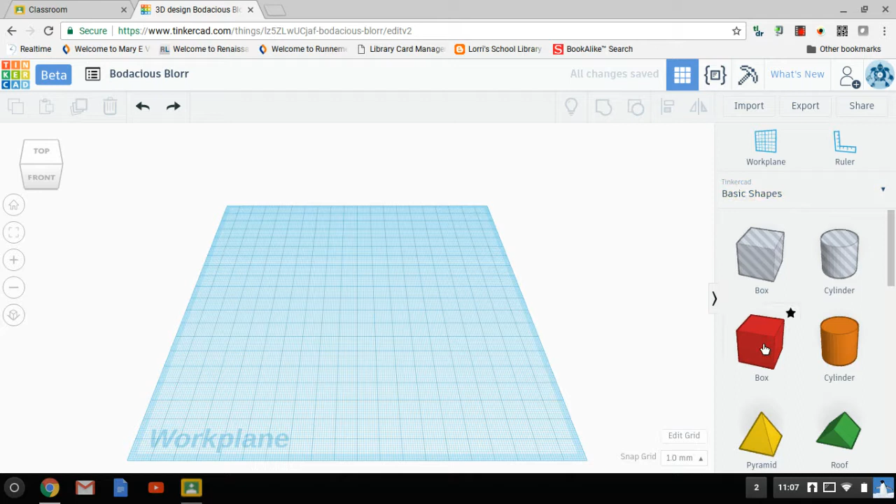So once you've clicked on that, the first thing we need to do is create a plate for your nametag to go on. We're going to use a basic cube on the print table, and that's going to allow us to stretch it out and flatten it so that we can build our nameplate on it. Under basic shapes, you're going to grab this red cube and pull it out onto the work plane.

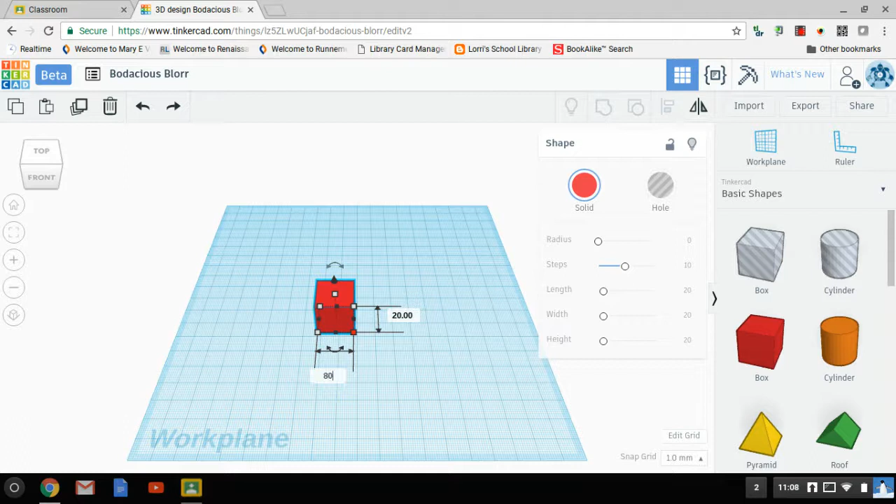And then we're going to actually stretch it out. The easiest way to do this is just to click on this white block here. Once you've clicked on that, you then have the option of typing in how big you want your plate to be. 20 wide is fine, we're going to leave it at 20, but we're going to change the length to 80. Now you can adjust this once you've decided what you're writing, but this is just a basic start.

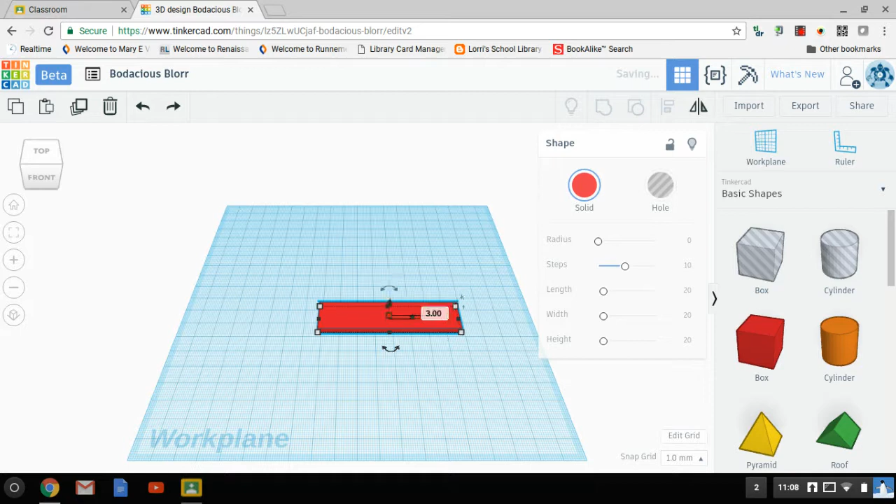Once you've done that, we also have to make it a little bit thinner. Right now this is very, very thick — it would look ridiculous as a nameplate. So we're going to change the height to 3 millimeters, by clicking on the white block here and then changing 20 to 3 and hitting enter. That's going to flatten this plate down for you, so now you have something to build your nameplate on.

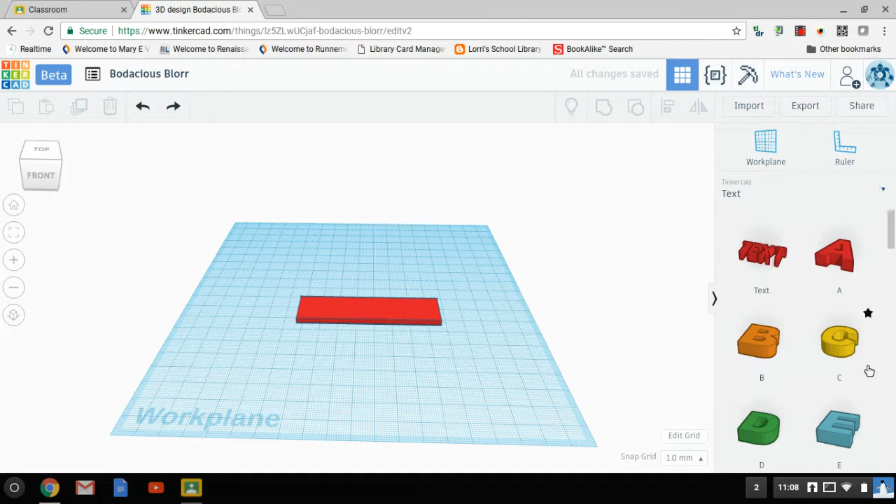After that, notice there is some thickness from the nameplate. What we want to do is be able to pull letters out. But right now, if I come over to basic shapes and choose text instead, and pull out the letter C and put it on the plate, it almost looks okay if I zoom in a little so you can see it better. But once I look at the side, you see there's not very much thickness, and if I look at the bottom, you can see it's cutting through the bottom of the plate. That's not what we want.

And if I pull it out, look how thick the letter actually is. So what's happening is the C is coming out on the work plane, and it's actually kind of being cut in half, or really three-quarters, by the plate itself.

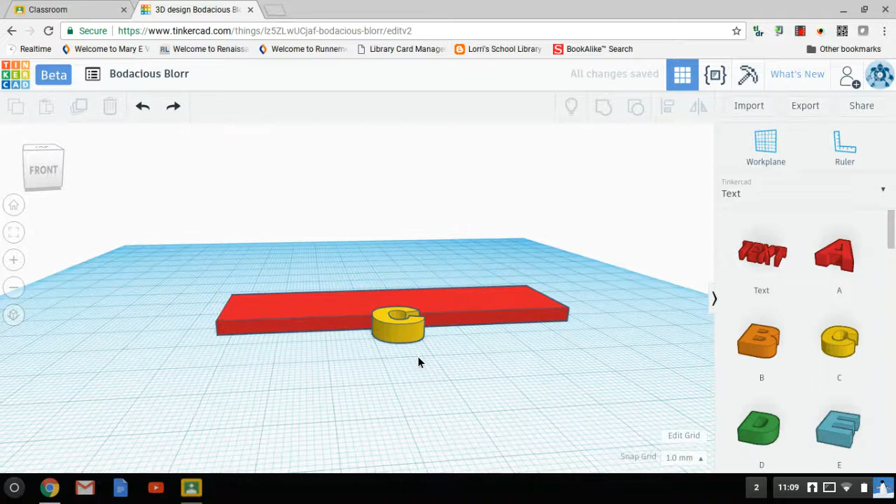So to fix that, what we want to do is grab what's called the work plane. This is the work plane here. When I click on that, it gives me this little block, and I can move where my objects come out. Right now, I want it to be on top of this plate, so if I click here, I now have this orange work plane, and you can see the difference where the print plane is.

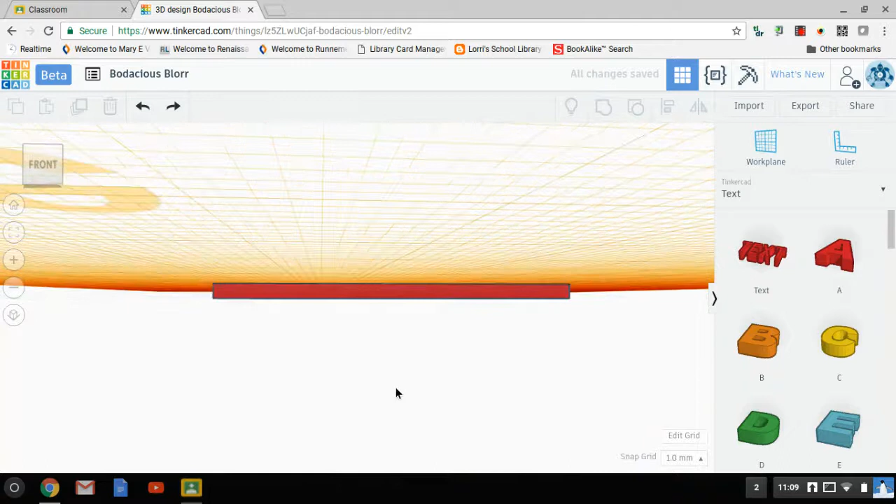If I get just the right angle, you can see the print plane here. This is the blue print plane, and this is the new work plane that's on top of our plate. So what we're going to do now, if I pulled out the C, rather than sitting below the surface, now it's sitting right on top, which is what we want.

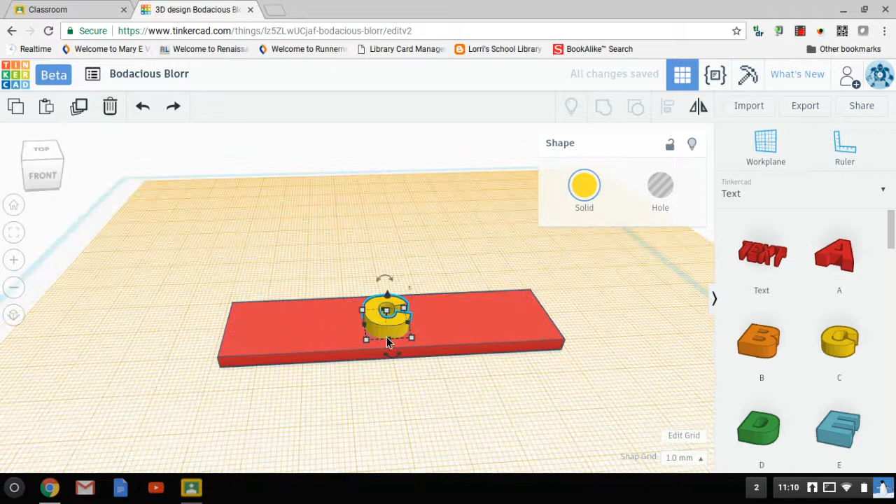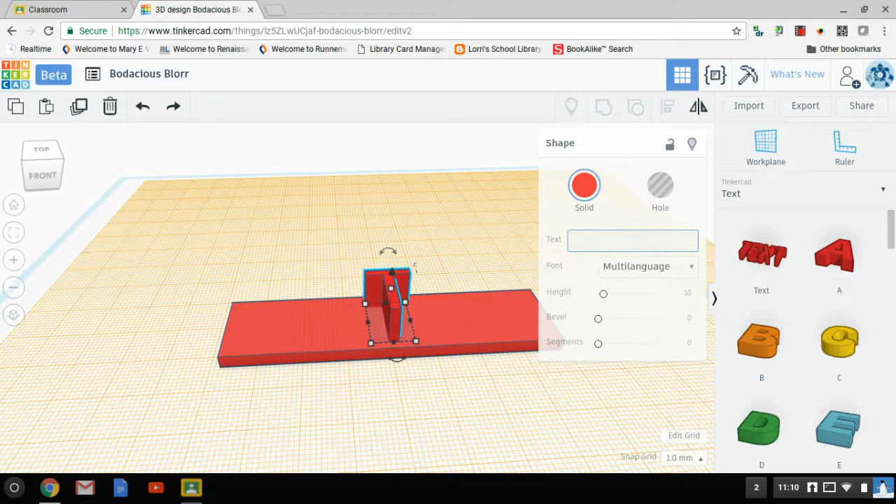I'm going to say Hawks, that's what we are here. And then you can click off of it. Right now, this looks pretty good, but what I want you to do is check from the top view.

So if you come over here, you can actually rotate it to the top. Notice now, when I'm looking at it from here, I can see it's pushed all the way down to the bottom. So if I click on the words again, I can use my arrow keys and walk it up so it's centered on the plate.

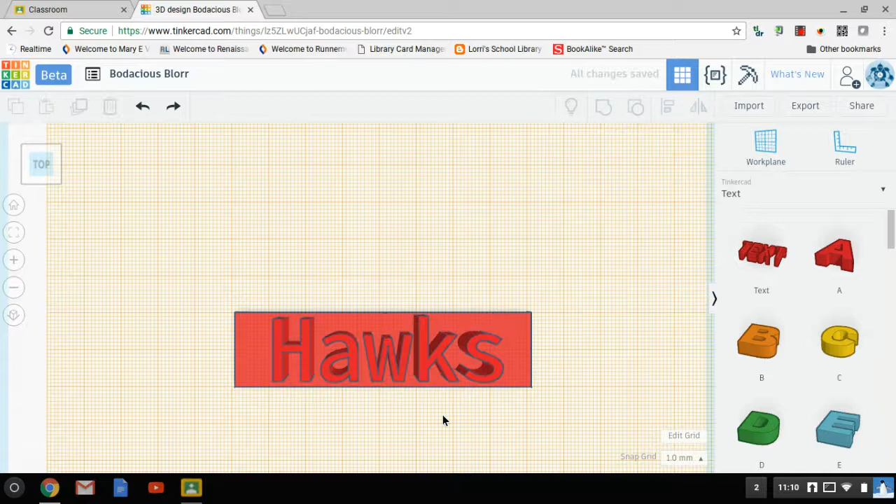Once I've done that, take my work plane, click over here off of the plate, and now I'm back to that blue work plane—you can see it's good. So this is option 1 for your nameplate. You can go ahead and just put your letters like that.

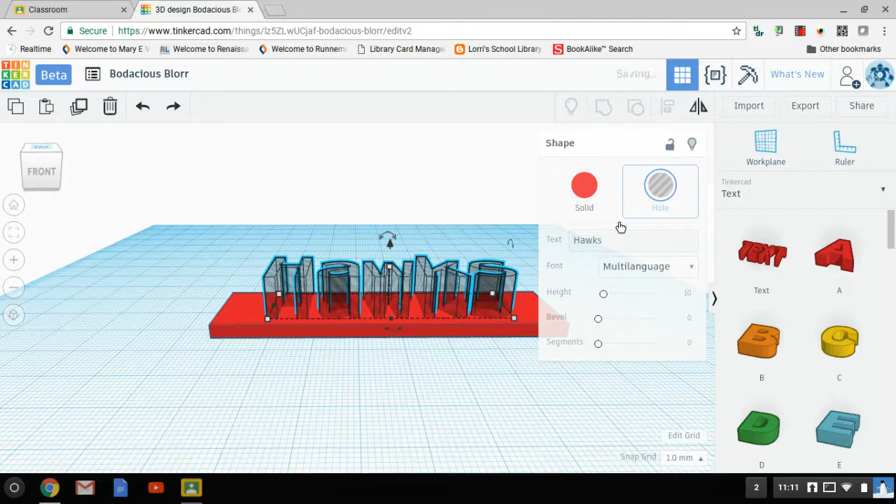Option 2 would be to change these to a hole. So if you click on them and choose this button here, which is hole, I can now grab it and drop it through. And it's important that it's sticking out of the top and the bottom—that's how I know it's going to cut all the way through.

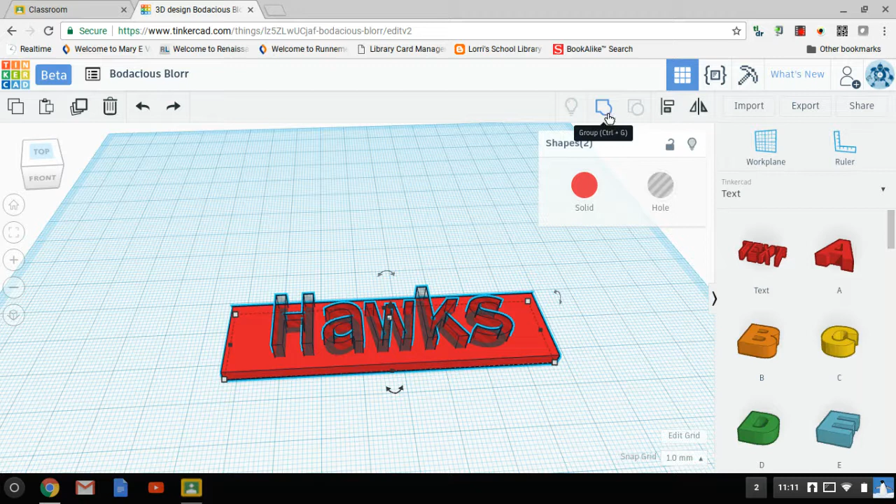Now it's not a hole until I actually group them together as one thing. So I'm going to click, drag a box around it, and then this is our group button right here where it says group. Once I do that, it's going to make it one thing and it'll cut the hole out. So that's option 2—you have the 3D letters, you have the hole cuts.

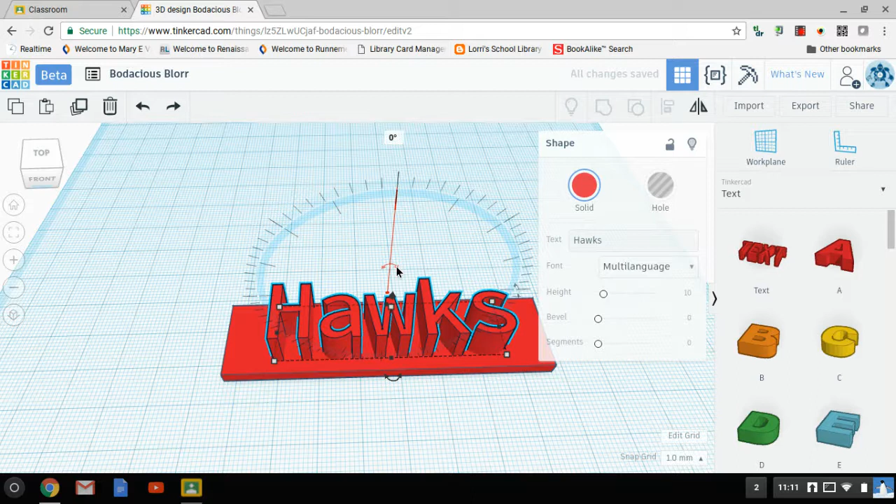The last option is to change this to standing up. So if I change this back to a solid, you'll notice there are these little arrow keys that rotate. This one rotates it this way—that's not what I want.

This one spins it around—again, not what I want. So I've got to find that third rotation. There's always three. So the third one, you may have to change the angle you're looking at. So this one is right here.

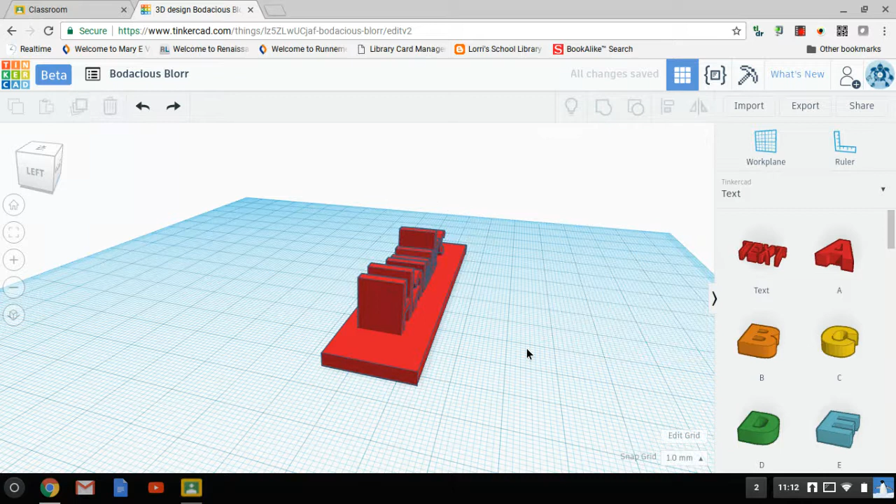And now I'm going to rotate it 90 degrees. Once again, I'm kind of sunken a little bit into my plate, so I'm going to drag this up a little bit so it's sitting right. And you want to make sure that you're not floating, because if you're floating, it won't connect.

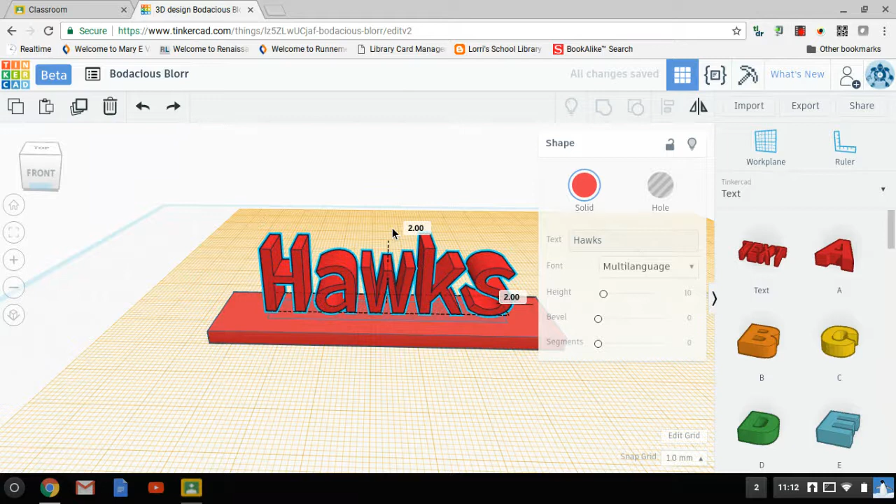You can check that by putting your work plane back and making sure this is at zero. This number stays at zero right there—that way you know that you're on the plate. All right, that's basically it.

You can then decorate it however you want. There are some shapes that have hearts and stars and things like that in the shape section. You can try to build your own shapes by putting different shapes together, and go ahead and work on creating your nameplate.